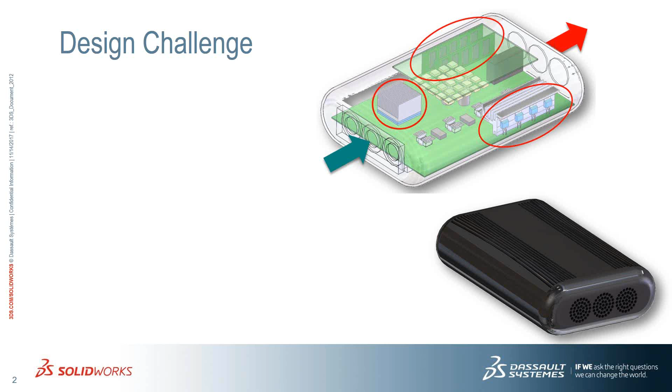At this point, I'm going to hand it off to Joe to talk about the design challenge and the initial simulation setup to investigate the airflow. Joe, go ahead. Thank you, Sasi. So today's design challenge, as you can see, representations of the geometry that we're going to be working with today. And I want you to think of the constraints that we want to model to.

Okay, so first in the top right, we have a CPU that we want to maintain at a max of 68 degrees Celsius. We have a package of integrated circuits that are connected to a customized heat sink, as well as some RAM chips along this board here, down to a maximum of 59 degrees Celsius for the chips, and the integrated circuit package is 95 degrees Celsius.

So if you focus on the bottom right image, you can see some features, slots on the top here, and some holes for perforated plates that you would find typically in an electronic enclosure such as this. So one design consideration is to change the packaging. So we're going to look at how we can change that, as well as the number and configuration or location of fans that we have on the outside here, around where the circular perforated holes are. So our overall objective is to keep everything cool and minimize the heat buildup within this compact CPU enclosure.

So first, let me step you through the software by pulling up my SolidWorks interface here. As you can see, I'm working in the SolidWorks interface, and I can go to my configurations; I'm working with the default configuration right now. And to do an analysis, I'm going to enable through this toolbar my Flow Simulation tab, which allows me to set up the study that I want to run.

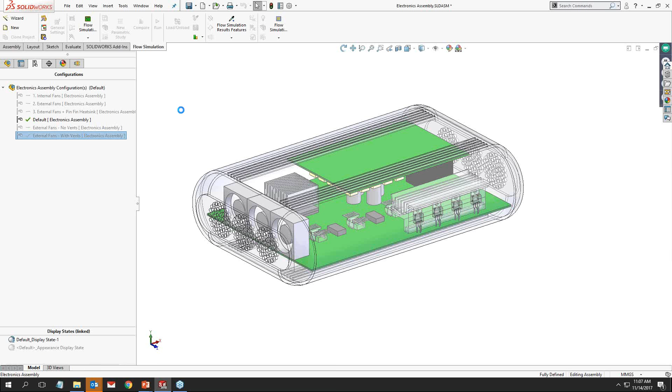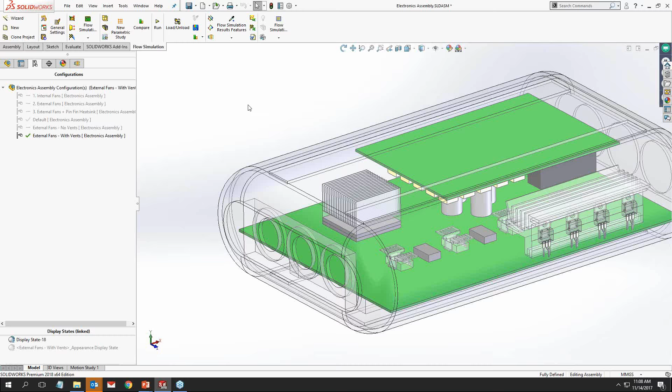Now, I'm going to run with a simplified geometry using a configuration, and that's to facilitate the analysis. A few things I will mention: we got rid of the holes and the slots, as you can see. We're going to be defining some modeling conventions that you would use in a thermal package like this to simplify it by using a pressure drop model, specifically called perforated plates.

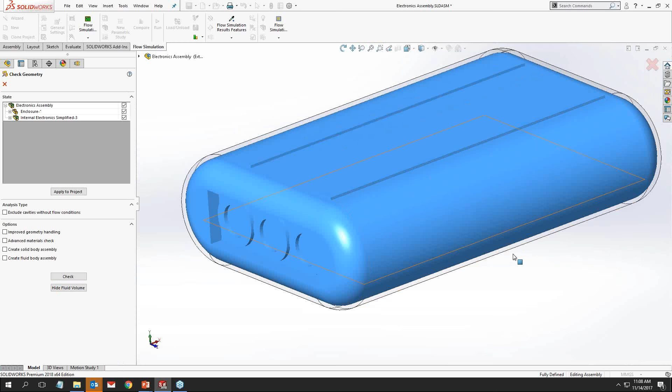So this creates a watertight solid. That watertight solid then lets the software know where the voided region is, where the fluid would be. So there's no need to create this fluid volume yourself. The software inherently knows it when you have a watertight volume for an internal flow calculation.

Now, for an external flow, if you wanted to also simulate the air around the outside, we would do that by an external flow calculation. And in that case, the enclosure does not need to be watertight, but you change the computational domain, the size of the box in which you want to simulate the calculation.

So we can set up a new calculation by working from a template, and if you're working on similar types of projects all the time, you can create a full template, which you can use as a starting point and then use different geometry for that template.

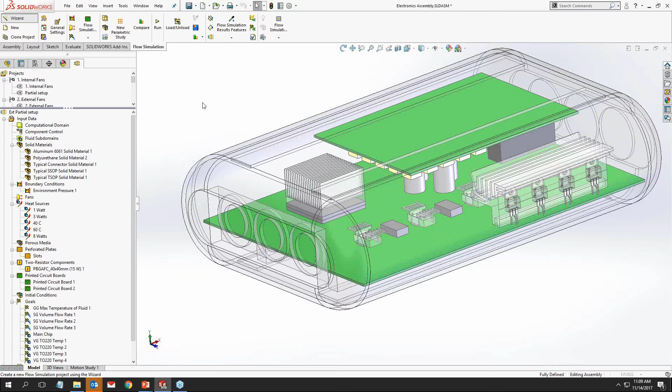But I'm going to step you along in a wizard-based interface, and I'll call this project name webinar 1. I'm going to step you along in this process of defining the initial settings for the calculation. We're going to quickly go through this, selecting first our units. There's your standard predefined like SI or Imperial or USA units that you can choose from.

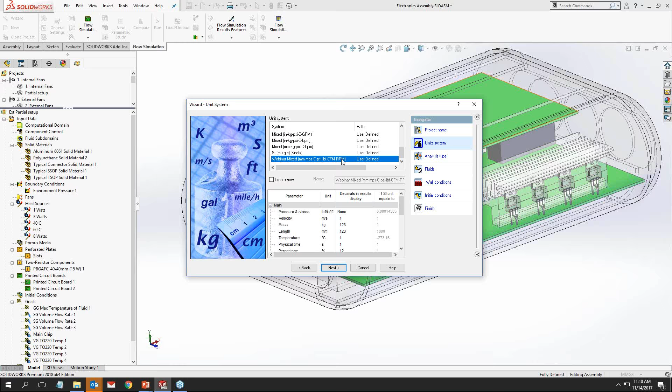But more often than not, we like to do something that's customized to what I like to use. So I have a mixed unit system that utilizes PSI, which I'm more familiar with, but we're also using degree C, as we saw in the definition of this problem. And there's a few other things that I've defined, and I name this to remind myself. So the fan flow rate is going to be in CFM, RPM instead of radians per second, and things like that. So you can customize the interface for your own usage.

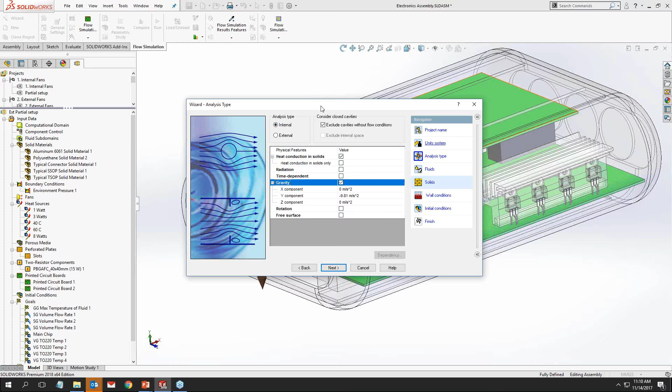Now we're going to look at the physics of the problem. So is this an internal or an external flow? As I mentioned, we're going to be simulating this as an internal flow. We're going to include heat transfer in the solid, and we want to turn on gravity. And so gravity is in this vertical direction in the Y as we would like that to be.

And we also mentioned that we have other thermal heat transfer methods such as radiation that you can include. So we're going to be doing both conduction and convection in this example, but if I wanted to, I could also include radiation. We do have local and global rotating bodies. We can do free surface flow, and we can do transient analyses as well.

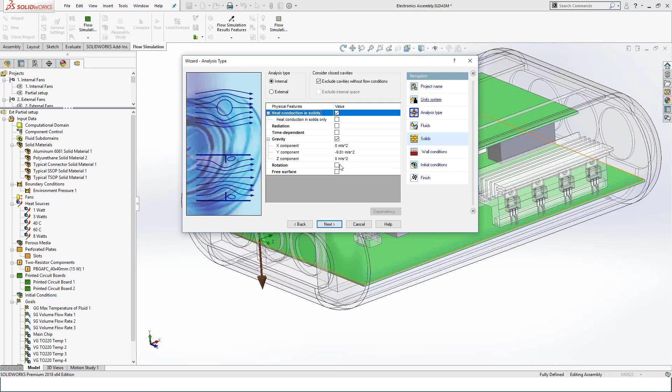If you just want to solve a problem over, say, 10 minutes and see what the results are after every 30 seconds, it would be as simple as defining these conditions as you're seeing on the screen right now. But this is going to be a steady state calculation for all the results that you see. So I'm going to disable that and move forward to my next case, where I'm going to define my fluids.

So we have a whole library of fluids, as you can see here, of different types of things: perforated plates, porous media, printed circuit boards, and other conditions that we can define. As you can see, air here has temperature-dependent properties for specific heat, thermal conductivity, and what have you. So I'm going to add this air, and I will mention real quickly that you can also define your own fluid properties through that library.

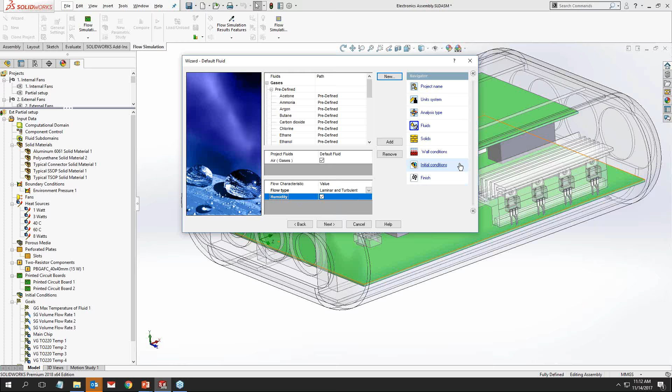I'm also going to enable humidity as part of this condition, and that will just change some of the conditions for that fluid, which I can set later in my initial conditions for the humidity of the environment.

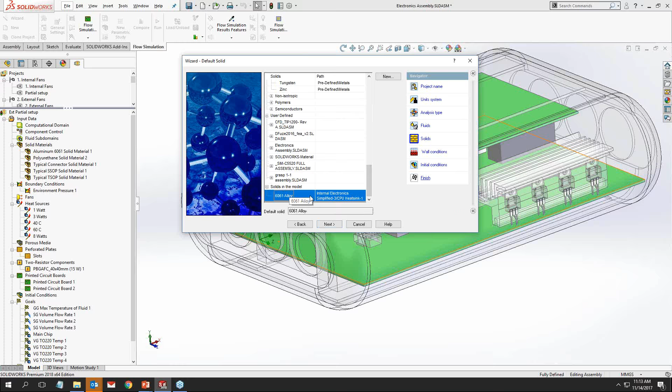Since we're going to include solids in the body, we just want to make sure that every part within the model has a material property defined for it. It may not be defined in the SOLIDWORKS model, but we need to have it as part of the thermal simulation. So we have your standard metal materials, also a lot of different alloys like aluminum 6061. So I'm going to set that as my predefined solid. But in fact, that 6061 alloy was defined in the SOLIDWORKS model, so I can reuse material properties that are defined in the model. So just making sure everything has a material property.

In my default outer wall condition, since this is an internal flow, how am I dealing with what's going on outside, whether it's fully insulated, or I can define a heat transfer coefficient, a wall temperature, heat generation rate would be another condition. So we're just going to say that this is at 15 degrees C, which is also 59 degrees Fahrenheit, and say 8 watts per meter squared Kelvin for a heat transfer coefficient as an average value over the entire outside.

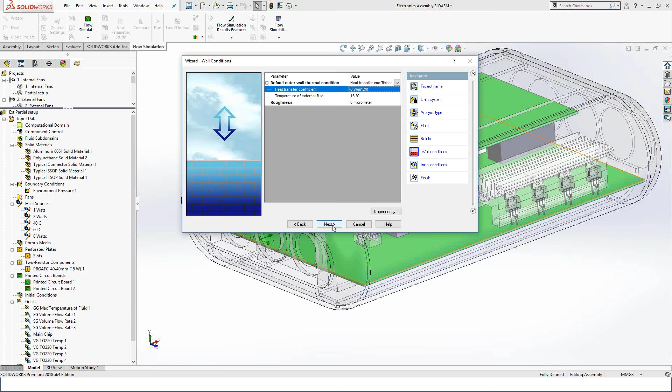Now, again, if you want to have more localized conditions, you could do that as an external calculation. So we're going to set here again our outside conditions. The humidity we'll just keep as 50%.

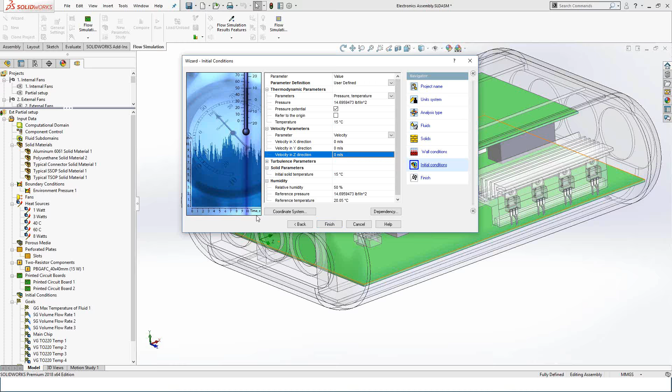Solid parameters, we can start that as an initial, same temperature as the other one. And this is just going to be sitting in stale, non-moving air. So those are my ambient conditions, or if you're running a transient, it would be your initial conditions.

All right, so you can see within the interface here, some of the first things you see is the computational domain, which can be modified. We can do 3D as well as 2D simulations. On a given body, you can utilize symmetry or periodicity.

So for example, since this is the same value, different sign, if I set the Z direction, if this were symmetric from left to right in the Z direction, I don't have to change the SOLIDWORKS geometry. I can just change the computational domain and then set this condition here as being symmetric like that. So it's a very nice interface for dealing with that.

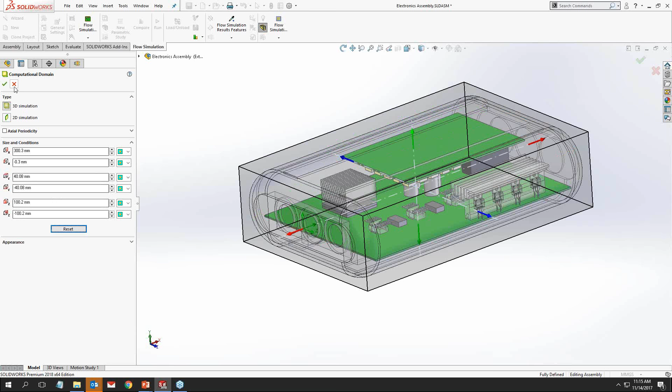And I just hit the reset button to bring me back to the normal because I'm happy with this, and I'm just going to hide that condition as such. Now, to facilitate this webinar, just real quickly, I already have some of this set up for me with some of the conditions, and I'm just going to walk it through with you, adding some additional conditions.

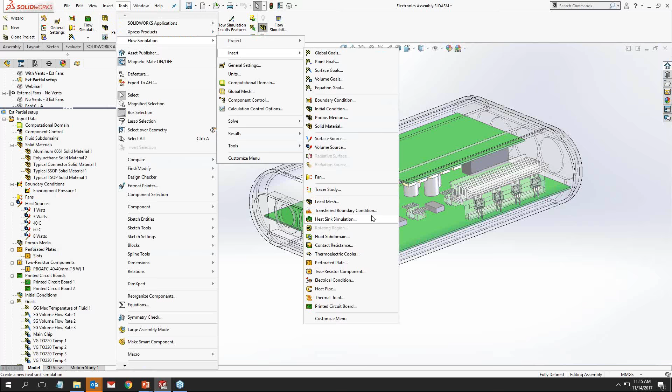Now, note that this tree is customizable for things that you're going to often be using, but you can always go to the toolbar and insert any condition that you want that is specific to a project. So these are default things that are always going to be in the tree, or things you can add to that as needed.

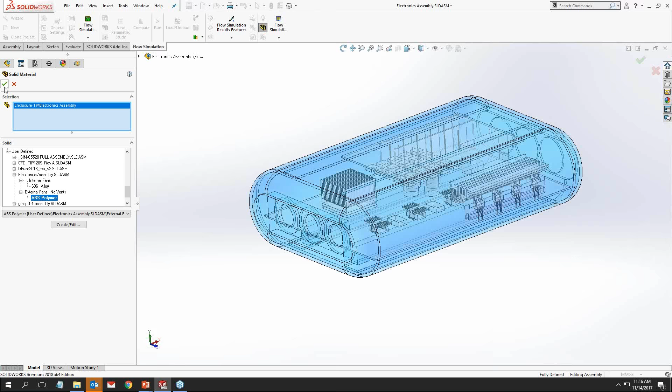In your solid materials, we can import data from the model, as you saw, for all the parts. Or here we also can utilize our library, and I'm just going to choose an ABS material. I believe this is an ABS material for this enclosure on the outside, and then that gets added here to that tree item.

Then we can define our boundary conditions. So we have inlet and outlet mass and volume flows, as well as Mach number. If, in this case, we want to do a compressible flow problem, we could do that. And then we have pressure conditions, which I'm going to be defining, so I'll come back to that,

as well as wall conditions. So, if there's some locally rough wall or temperature in the wall, or wall motion, if you want to define that, you can just set these as real walls, but we also have ideal walls and a different outer wall condition if you want to for this internal flow calculation.

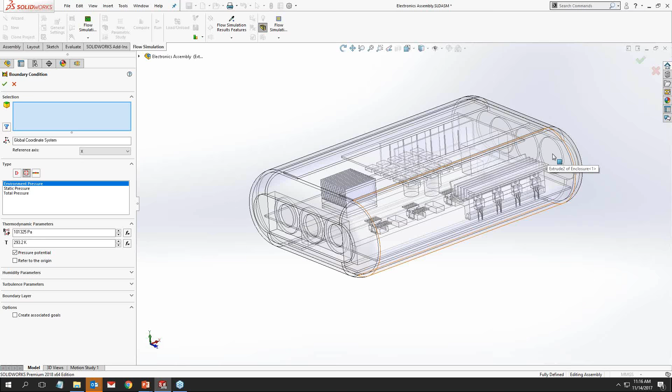But I'm going to be defining an environmental pressure and utilizing, if we zoom up here to see what I'm doing, right click and select other, just like you would in SOLIDWORKS, to select these faces which were closed off, and then I can define these environmental pressure for those at 1 atmosphere is what that value is.

So that was already defined. That's fine. I think I meant to define the slots, but you know what? This gives me the ability to show you a functionality real quickly here. So environmental pressure 2 is the ability to copy these slots to the project that I am working on here, which is the partial setup problem, right?

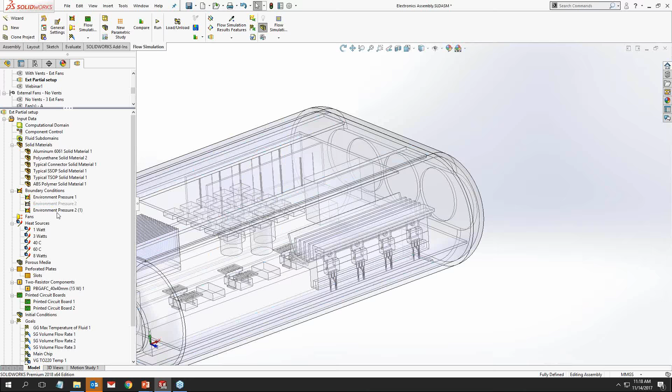So if I go back to this new project, you can see that that was defined and copied for me there. All right, and then we have our fans. So we can define these fans, which are set up here. They're on the outside, and they're only going to be blowing inside to the volume. We can have ones that are venting or fans that are set inside completely within the volume.

So this is the inlet fan, so I'm going to choose a face here, again using my selection tools to help me select the right face. And then I can choose from my library of fans my fan curve here.

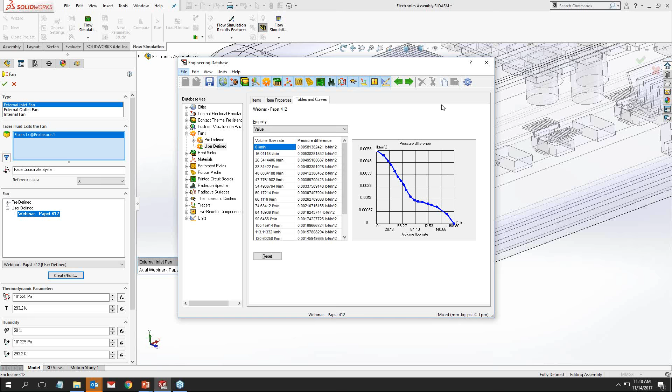And just to show you how this is defined, because this is going to be applicable later, is just the real way in a fan curve how it behaves with your pressure drop in PSI versus your flow rate that it can deliver at that pressure differential. So we'll set that here for us and hit OK.

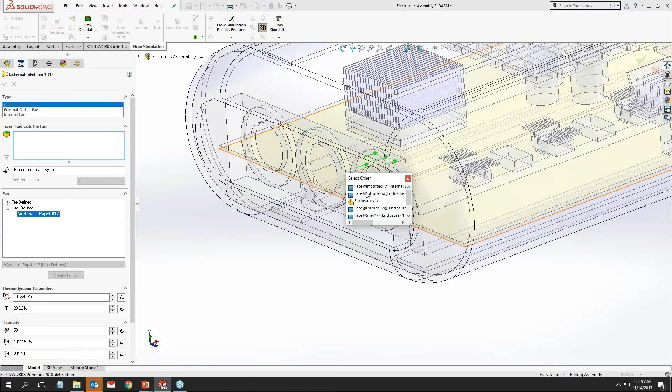All right. So we can do this for all the other ones. Again, just copying this to my existing study. And then just assigning a new face for this is one way that you can do that. So just choosing that new face there.

And then you can, using Windows functionality, copy that to there. And then we could define the other one in the same way very quickly. You can see that this interface allows you to do this quite easily.

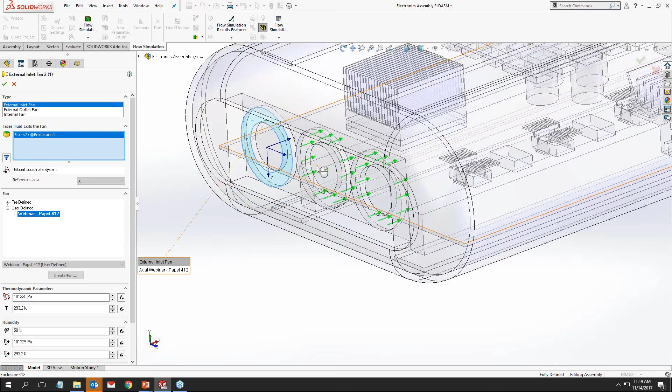Oops, 3. Wrong one, that's okay. And then we have heat sources. So let me run through with you the heat sources that we have here. We have these 4 components. Each of them, since there's 1, 2, 3, 4, are a ¼ watt each. So we define these as a total. And since they each have the same volume, they're the same component, we can define them like so.

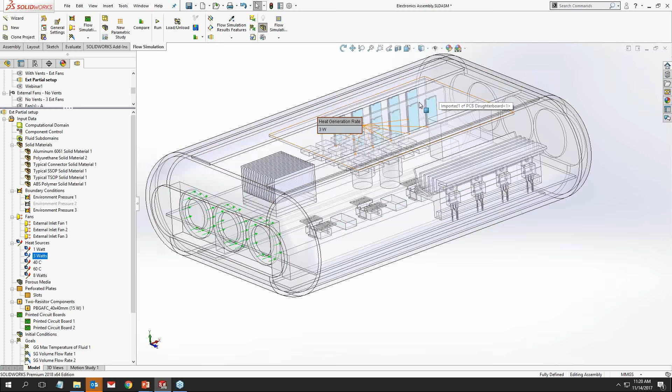We have 3 watts on all of 1, 2, 3, 4, 5, 6... 1, 2, 3, 4, 5. Sorry, 10 total. 3 watts. 40 degrees Celsius for these capacitors. These are 60 degrees C. And then 8 watts, or actually 2 watts total. This name is incorrect on there. But these each have a ½ watt defined for them.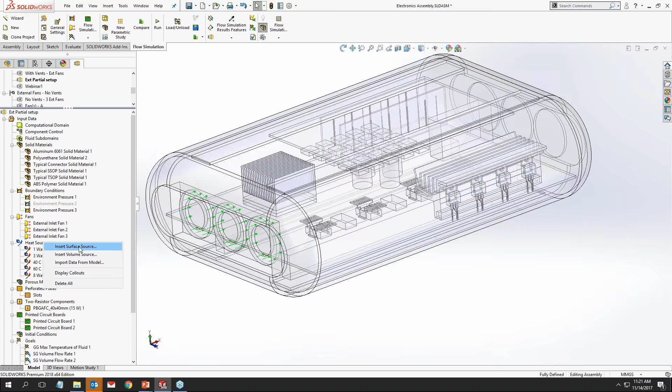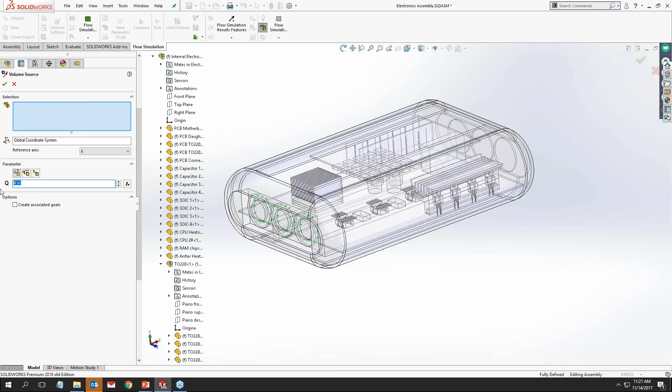So I'm going to show you, we can define a surface or a volume heat source, right? And the real difference there is just how you want to define those. So I'm going to use my tree and select these 4 components like so. So this would be one way in which you can do that, selecting them all and putting in 4 watts for the total. But let me clear this and make this only a single one, because there's another really nice functionality that I want to show you.

Let me see here. Okay, so let me just suppress this. I forgot which ones I was defining. So anyway, if I define this 1 watt for this, I can right click and again apply that to all the other conditions there. All right, let me just skip over that.

And how are we going to handle the perforated plates? So we have the slots that are on the top. Let me just describe what this is doing. So instead of having the slots modeled, what we can do instead is define the free area ratio, how much of that area allows flow to move through, and that sets up a normal pressure drop. So that's one way of doing it.

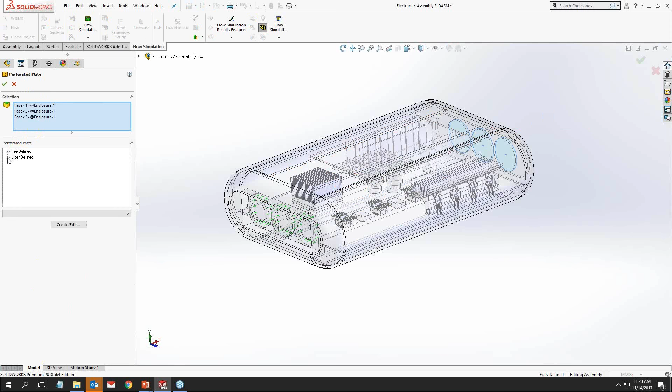Now, if we have something like small circular holes, which we're going to do on the back of this here, I'm going to pre-select this pressure 1, so those 3 faces, utilizing information that I've already used, and then I'm going to choose this one with the circular holes, because there's also an additional way that you can define these. Whoops.

Instead of a free area ratio, you can also define a pitch. So these are round holes with a given diameter, and you can then define the distance between them, say in the X and Y, and that gives you a free area ratio. That should be like so. All right.

Just coming down here to our other conditions that we're defining, we have an integrated circuit, a plastic ball grid array, 40 by 40, and we're defining this as a 2-resistor component, just to show you some of the details. So these are the components we're defining it to, as you can see selected here. The face that is connected, the hot side, is connected to the heat sink, and this is generating 15 watts of heat.

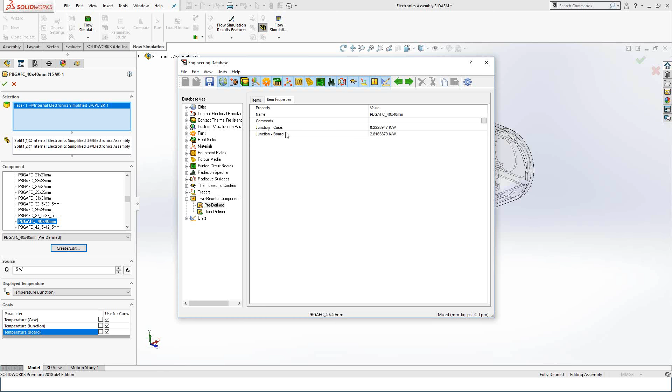And just a little bit of information about this specific plastic ball grid array. You can see that we're defining the 2 resistances, junction to case, and then junction to board, in that vertical definition.

And we have printed circuit boards, where in this definition we are defining the dielectric or FR4 materials and the conductor or copper materials, and then we can set up in a table how many layers, the thickness of the layers, and how much copper is on each conducting layer. And then it'll calculate the orthotropic material in plane and through the thickness, and also the effective density and specific heat for this 4-layer board.

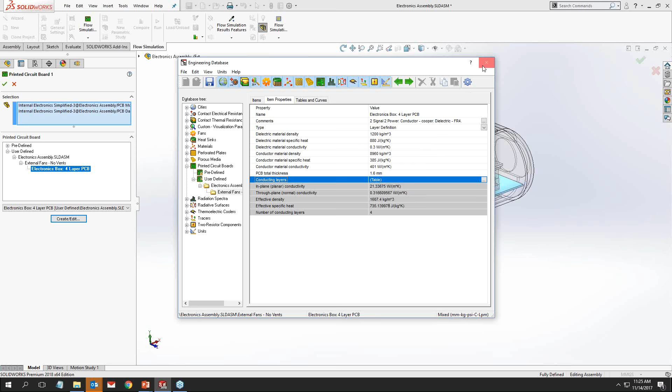So we have those printed circuit boards defined, and then the RAM boards defined in a different way. And then to set up what is important, the information that we want to get out directly from the calculation, as well as using these as convergence criteria, we can set goals either globally, at a point, on a surface, a volume or component goal, or defining an equation, say if we want to find pressure drop or other things. So defining a volume goal real quickly here.

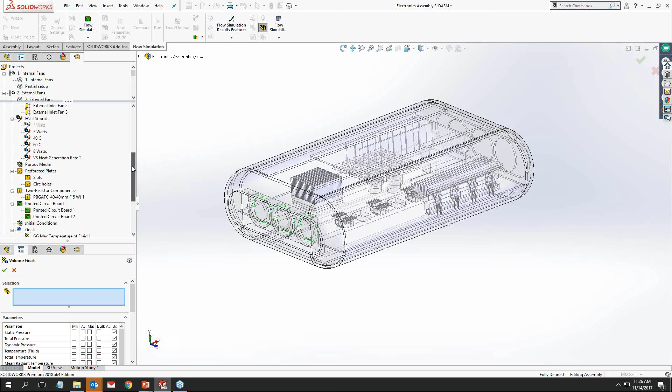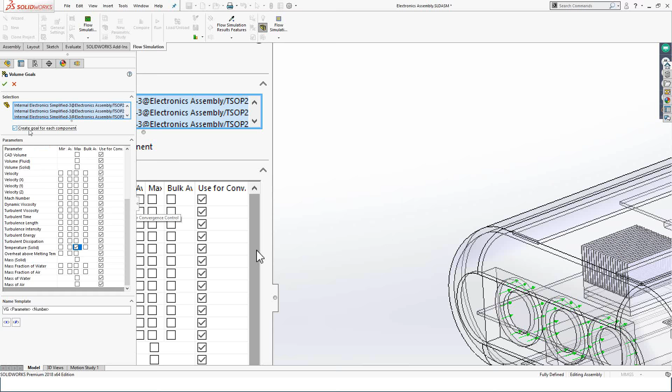I can reutilize information, just choosing this and then selecting the RAM chips from that. All of those are populated here within my selection, and then I can choose my temperature of solid from this list down here and choosing the maximum value from this column right there. And then define a goal for each component. And that defines all of these, and I can rename those to be more descriptive.

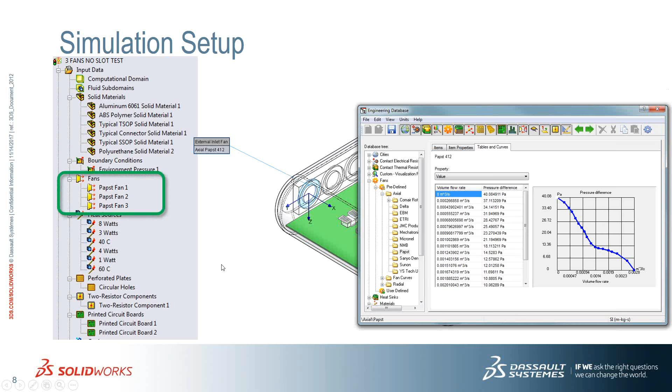All right. So let's go back to the PowerPoint real quick, just to review this setup. So we set this up as an internal calculation with heat conduction in the solids, as well as gravity, setting up the air condition as our fluid, defining our environmental pressure condition, in addition the circular perforated plates, defining that pressure drop, as well as the fan condition, those 3 fans, setting up our heat generation rates as well as our printed circuit boards, and then we can run the simulation.

All right, so Sashi will run through and show you a little bit more about how you can do multiple simulations, but if you're running just a single setup like this, you can run it on as many CPUs as your machine has. In this case, a quad core virtualized to 8. And you can see that it's utilizing all of those cores very effectively. We can run the simulation, and you can plot out and view the progress of these values as they're calculating and iterating along.

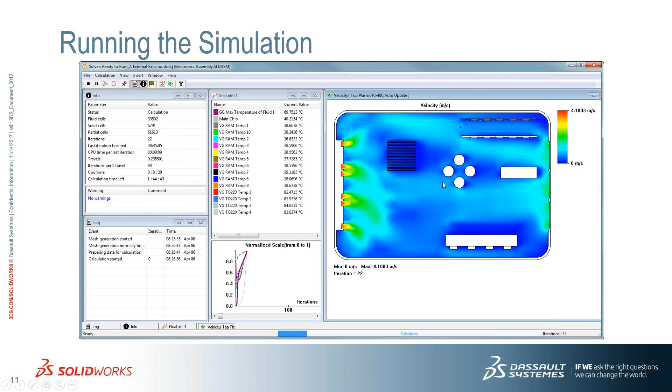Similarly, for a transient calculation, you can have the X being the physical time, and you can also visualize the results as they're calculating, either as contour plots or vectors. All right, so it gives you progress on the simulation. So really quickly, the setup is easy to use, it's embedded within SOLIDWORKS, and it does a very good job to allow you to set up your thermal problem. So let's take a look at what types of results that we can look at.

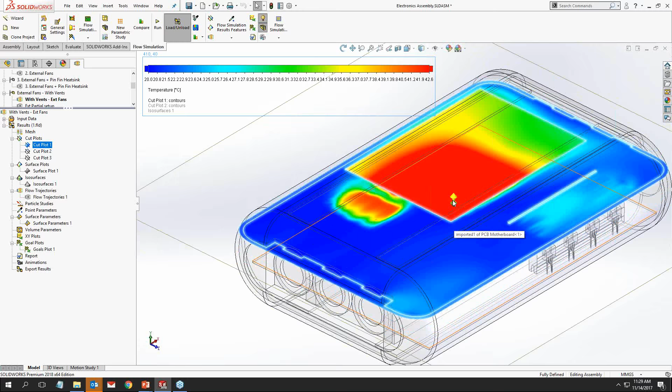Going back to our interface, let me go to this problem that is already solved and go to my results, and I'll just load those in. So we can show our cut plots. As you can see here, we have our temperature. Let me make this horizontal here and expand this a little bit so you can see this. And we have the results everywhere in 3D. So you would only be able to see this type of information from a virtual simulation like this. Okay, so you can drag and drop that anywhere.

You can also probe the results, right? So if we're interested in the temperature as well as maybe velocity in different locations, you can choose which parameters you want to show. So I'm going to show the location of those points as well as the velocity at all of these, if that is applicable. Here you can see on my solid it's 0.

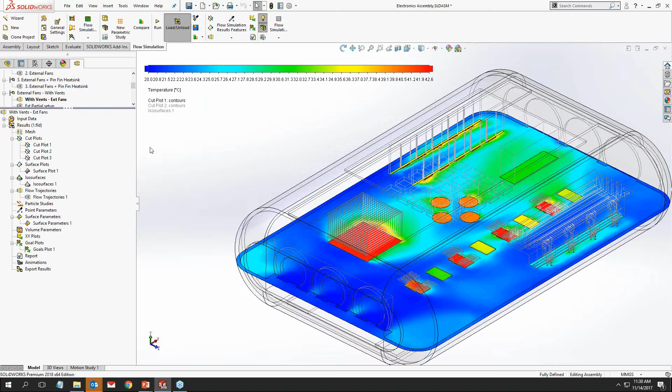We also have surface plots to show, say, the heat transfer coefficient on this heat sink, as well as combining this with our flow trajectories colored in a different color scheme from 0 to the maximum velocity. And I can play these flow trajectories to show how that is acting to cool down that heat sink. And you can see that only on the front face of that do you have the maximum cooling efficiency.

All right, so you get a lot of different visualization capabilities, but we're not limited to just that. You can also take a look at those goal plots in greater detail, right? So insert a new goal plot, choosing all of those, and we can show those on the screen at the bottom here like this, either a summary of all of those values or a history of how they iterated and converged on those results.

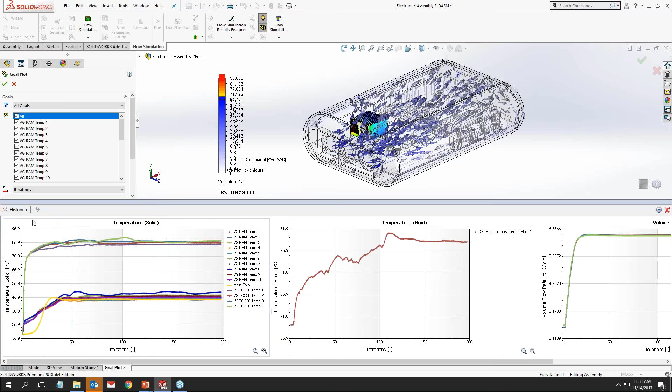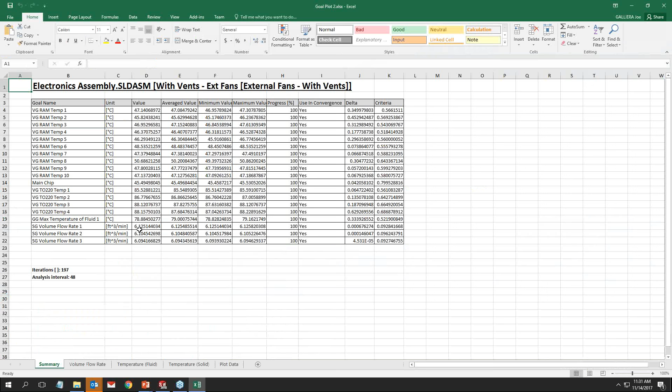And we also utilize Word, Office, Excel, and you can export that directly to here and set this up for the ways that you want to present the data to your clients and colleagues maybe within the department, okay? So there's a lot of great information that you can gather both visually and in the data to understand the performance vividly. Now, in this situation, we noticed that there's a lot of room to improve the design. So I'm going to hand this back over to Sashi, and he's going to lead you.

Let's hand this ball over to Sashi, and he's going to lead you on these design alternatives that we can evaluate. All right. Thank you, Joe.

Okay. So now that Joe has gone over the initial setup, this is very typical in a design environment where you have your initial design and you set up your analysis with all the given components that you have within your enclosure, and then you proceed to run the first iteration just to see what's going on internally. And flow simulation gives you that idea, right? So now we have a better understanding of how the airflow is flowing through the perforated areas, how the air is flowing out of the vent, how we are cooling a lot of the components in the system.

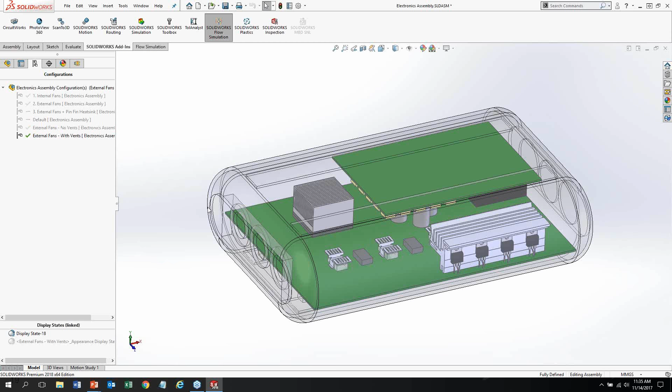So using SolidWorks, and this is really what's nice about flow simulation being fully integrated with SolidWorks, at any time we can go back and forth between the analysis environment and the design environment, right? So now we are taking a step back from the analysis environment and saying, okay, we're going to make a change to the actual design itself. So if we look at our configurations, we have several different designs. Our previous design had external fans with vents, and if I just do a quick section view, we can see how that vent was created here.

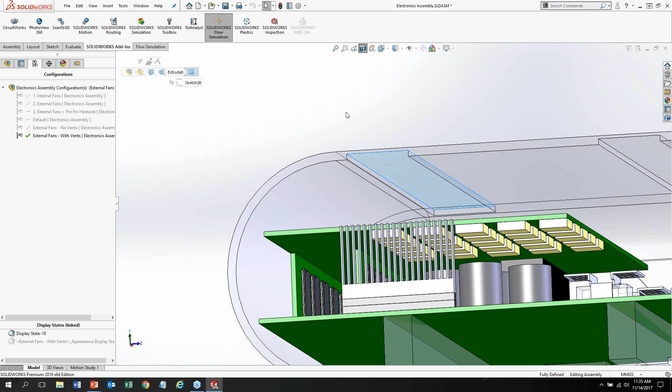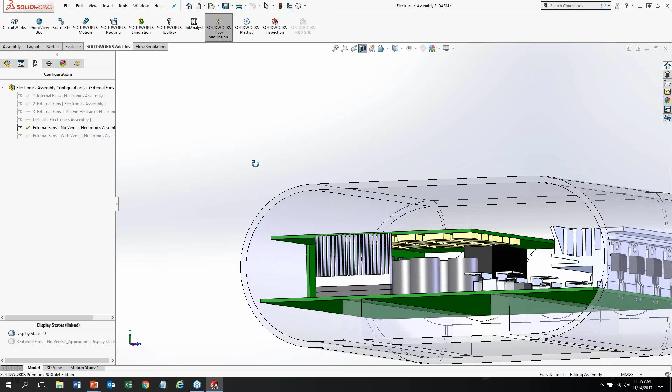And as Joe had mentioned before, this is a simplified model, so we don't actually have to model the actual vents itself. By setting up the surface area as a perforated plate in the analysis environment, we're able to solve this much quicker. So here is the vent in question, and all we needed to do in SolidWorks was to suppress this feature right here of this voided area. So I'm just going to switch over my configuration to no vent, and you can see now those vents have been removed. Okay, so I'll just click that to turn off the section view.

And we'll go back into our flow simulation projects. In terms of running the analysis, we don't have to recreate the entire analysis, right? Because all we did here is change the design, but 99% of the design still remains the same. So all we needed to do was clone the original study that Joe had created, and that can be done very easily. It's very similar to what Joe showed earlier in terms of copying to project. So for example, we have several different projects here. This is the project with vent. All you need to do is just right click the project and say clone.

And we'll say select configuration, and you just select one. We can say external fans with no vent, and you can hit the green check mark, and it will create the project that looks just like this. And automatically the perforated plates for the vents would be suppressed, or you can just right click and delete it all together.

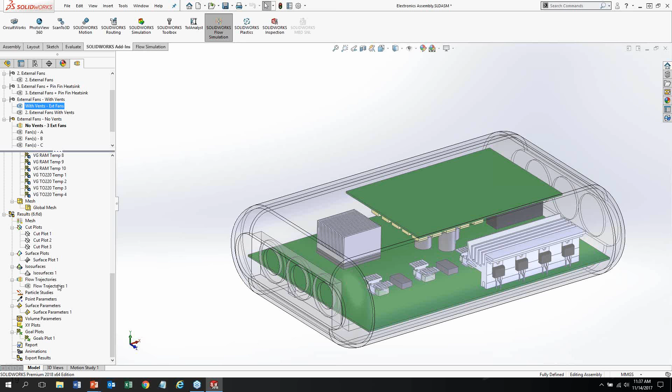Okay, so the analysis itself, we didn't have to make any changes, very quick and easy. All we needed to do at this point was right click the study and hit run, let the analysis run, and we can view the results. So we'll go ahead and jump right into the results. As Joe had showed earlier, the best way to see the changes or any type of airflow is to start with the flow trajectory.

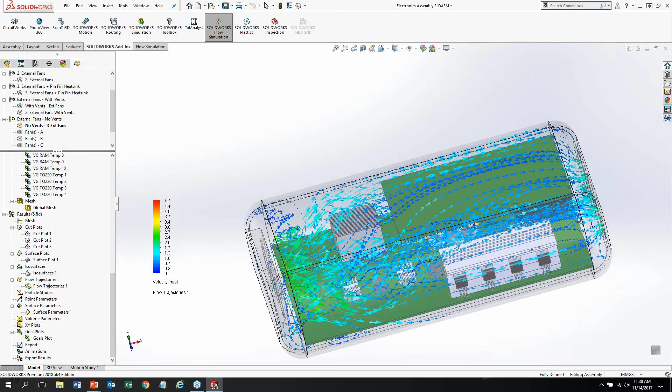So I'm going to say show, and we can just play this just to get an idea of how the flow is moving now. So you can see right off the bat, the change is that the flow is no longer moving upwards in the vented area. It's moving right through the system, from the fans to the holes at the end here, the perforated holes.

But the question is, are we still removing the heat, or the dissipated heat in the system as well as we did before? And the best way to do that is to really dive into the model. And there's several ways we can do that. We can either use a point parameter, maybe surface parameters. We can probe the model, and we can extract the information that we need.

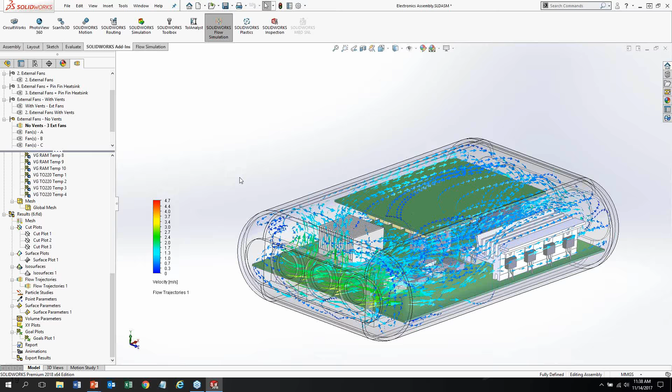Now, we are mostly concerned about three main components, and I'm going to show you in a second. We have a graph showing exactly what the temperature difference is with the vent versus no vent. But before we jump into that, I'll just show you the cut plots, so you'll be able to see it.

And I'm just going to make this a transparency. And that's another nice additional feature of the integration, is that at any time I can select any of the components and make it transparent to really dive in and see what's going on in the analysis. So we can see here, we might have taken a screenshot of the previous analysis with the vents versus without the vents. And we can see how the air is distributing now in this system.

So we'll switch back to my PowerPoint, and we can see the analysis with no vent versus with vent. So you can see how the air is flowing upwards versus the air moving directly through the system. So at this point, we might say, well, it seems like we are pushing hot air onto other components versus having released hot air.

But based on this view as well, we can see that there is some cold air being removed from the system through the vents. And this is due to the differential in pressure in the system, because when we have the vents, we are reducing the amount of air pressure within the system. With no vents now, there's only really one airflow in this axis, from the inlet to the outlet.

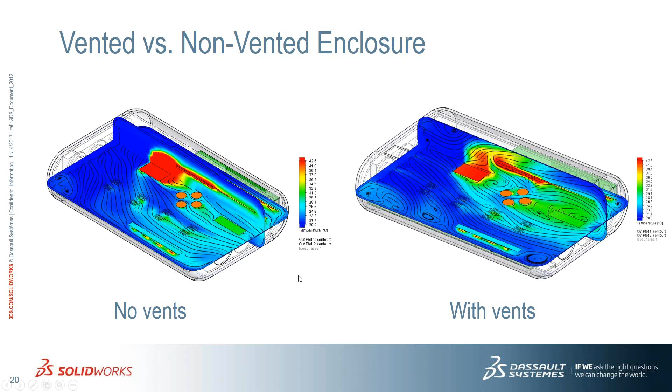However, for the RAM chips that we have within the system, we actually saw a decrease in temperature with no vent. And the main reason for this would be that we are restricting cold air from being released out of the system. And now we're actually having a more consistent airflow throughout the system with no vents, and those RAM chips are now getting a good distribution of cold air as well.

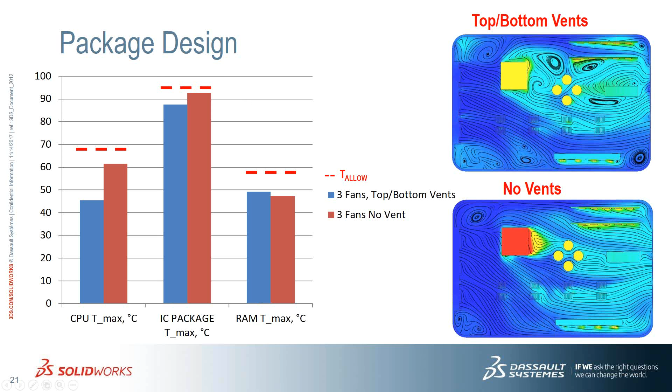So at this point, we might still be considering, well, is no vent worth it, right? Worth the extra added manufacturing cost. So not only with the vents, there's a few other things that we can consider here as well, right? So we say, okay, maybe we can go with no vent. However, can we still optimize perhaps the fan configuration to get the airflow as good as we did with the vents and all three fans blowing through the system?

So Joe had showed earlier setting up 3 different fans, and there is a question of whether all 3 fans are required in the system. So there could be different requirements in your design environment. There could be a noise requirement, right? 3 fans might be very loud. We might need to reduce the number of fans.

The position of the fans could be a requirement. And also 3 fans could potentially affect the airflow of the system, because now we have air intersecting each other. The differential in pressure within the system has changed. And again, going back to SolidWorks, we can easily test all these different configurations quickly.

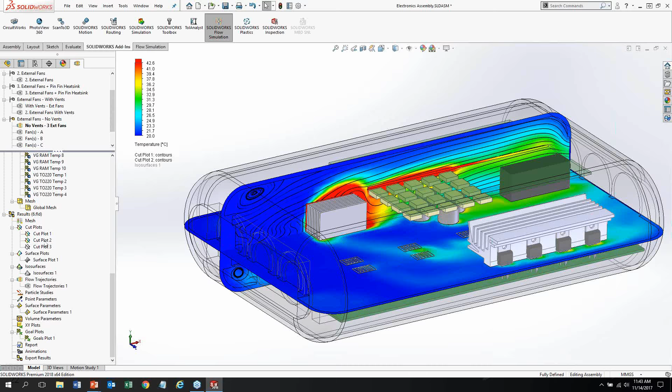So what we have here is we have 3 fans, which we have labeled A, B, and C. So I'm going to quickly just go over the airflow or the flow trajectory, so you can just see how the air is flowing through the system for A, B, and C. And then we're going to go back to the PowerPoint and see the difference in results.

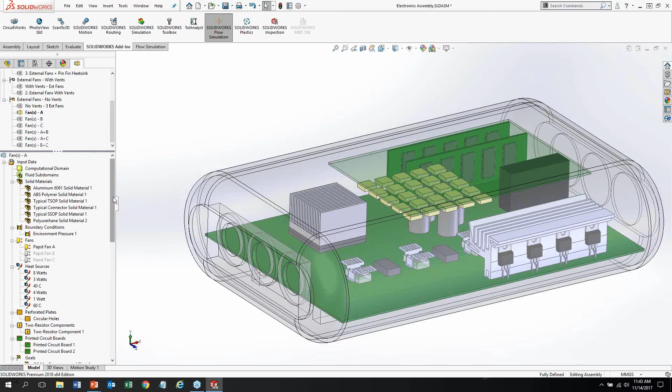So we will just activate this configuration, fan A. And I will say play. And here you can see that all we needed to do to specify that this configuration is only blowing air through fan A, and fan B and C are turned off, is just coming into the analysis and suppressing those 2 other fans. So you can see how easy it is to toggle between your different designs, right?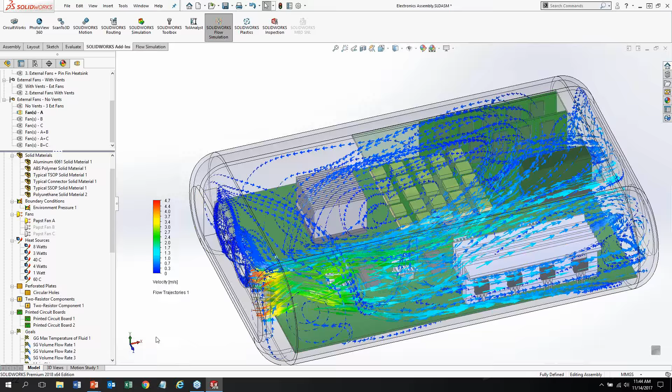So we have 3 fans. Now we're going to say, okay, we're going to just test for fan A and see how the air flows. And now we can see that there's a high airflow through this heatsink area right here. And I'm going to stop this. We'll look at fan B. And I'll just load the results here.

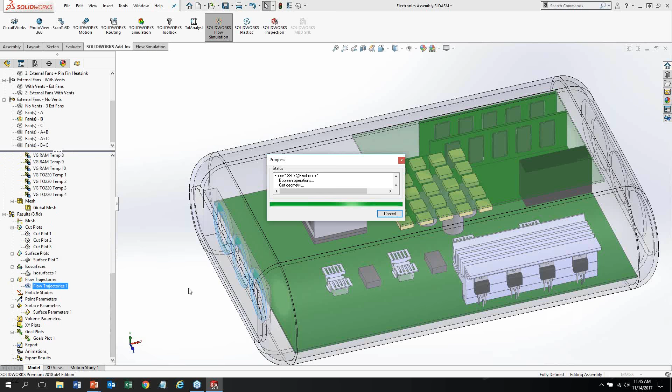Give me a second. And let's see the flow trajectory. And here is the flow trajectory for fan B. So you can see that we are creating somewhat of a whirlpool effect here. So a lot of cold air in this area. Not sure whether it's required in this sense. However, just to give you an idea of how we can quickly change the configurations to view the different airflows within the system, right?

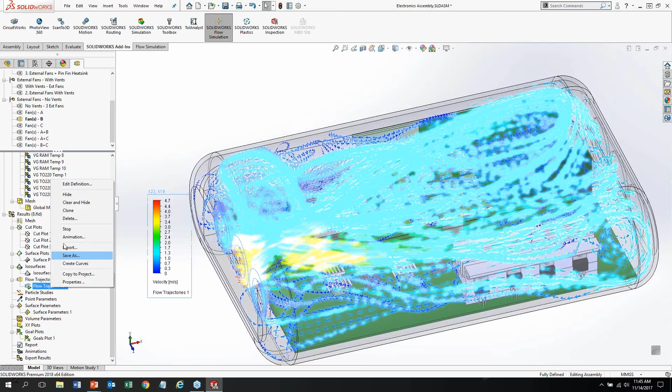So all this is still being done in a virtual environment. There are no prototypes being built yet, and we can use this different information to make the best design at the end of this process. So I'm going to stop this, and we will go back into the PowerPoint to see all the different configurations we have.

So just to give you a reminder again, this was A, the first fan here, B was this middle fan, and C is this third fan. So A, B, and C is only fan A or fan B or fan C being turned on. Then we have another configuration with fan A and B turned on, fan A and C turned on, and fan B and C turned on.

Now at this point you might be saying, well, there's quite a few analyses. It might take time to set up the analysis. Well, we already saw that cloning the analysis will help with that. We can very quickly just clone the analysis, suppress the fans, and run the analysis. But you might say, well, running 6 different analyses back to back might be time consuming. Well, in SolidWorks, we do have the ability to batch run our analysis.

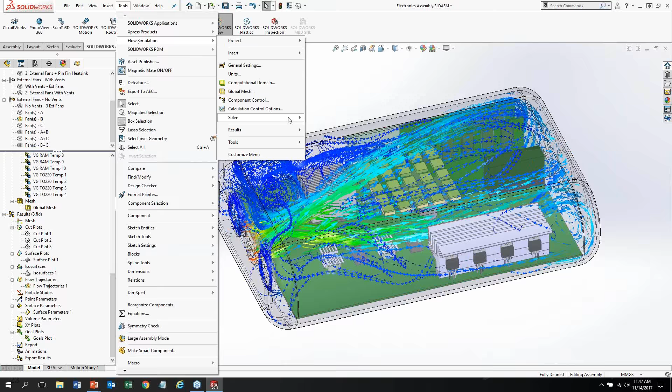So if you go into our tools here, Flow Simulation, and look at Solve, we have this option here called batch run. Basically what batch run does is it will take all the analyses that you have pre-set up. So in this case, I can set up all the different fan configurations. And at the end of the workday, when you leave to go home, you can actually just batch run your analysis and say, run all these analyses back to back.

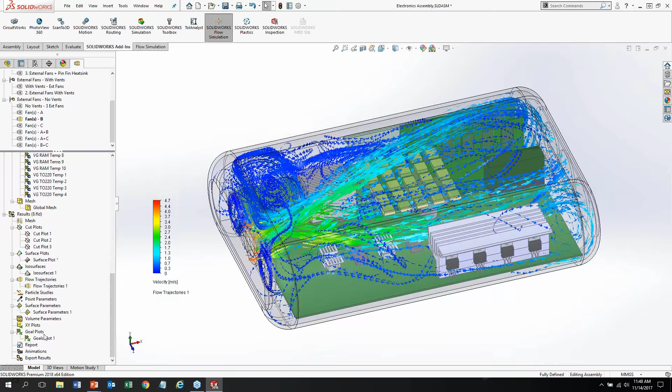And when you come back in the morning, you're going to have all these results ready to go for you to view the difference and compare the different configurations that you have to decide the best assembly. So in addition to flow trajectory, because of the way we had set up our goals, there are many other results that we can also view in this analysis, such as your goal plots.

So I'm just going to go back into this analysis right here, and you can say show. So here's a goal plot of this analysis, and we can extract information, for example, the heat sink for all three different configurations, whether it's A, B, and C, using this graph.

And all this information can be transferred to Excel format, so you can extract the max temperature, the minimum temperature for the analysis as well. And by compiling all this information, we can come back in here and we can graph something like this. So here again, the three main components that we're concerned about are the CPU, the IC package, and the RAM chips. And we can see the different configurations that we have, where this is all three fans turned on. This is only fan A turned on, only fan B turned on, and so on.

Now, clearly, when we have the air blowing from just the first fan A here, this entire area where the CPU is located is being missed, right? So there's no direct airflow on that area, which is why we can see there's a spike in temperature. So this first configuration, A configuration, is probably not going to work, and we just take this out of the equation.

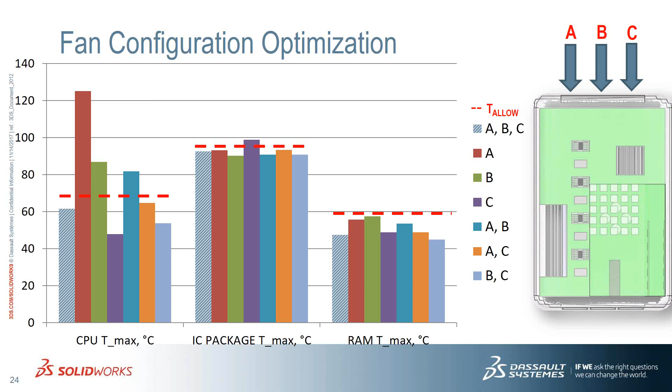However, if we look at some of the other configurations that we have here, such as perhaps B or C, we can see that for the IC package there's not much change in temperature. And also for the RAM chip, there's not a big change in temperature. However, there is a significant change of temperature for the CPU when the air is blowing directly on C. So here, what we've uncovered is that just C alone, one fan, could work for this analysis with no vent included. So let's go ahead and take a look at actual numbers.

So we'll see here that for the IC package, our T max is all within the 90 range, so plus or minus 2 or 3 Celsius. And again, as I said before, that A fan is just out of the question here, so we won't even consider that. However, with the C fan, we are getting a temperature of 93 degrees, so it's probably about 3 degrees higher than the minimum temperature, where we have A and B or B and C fans.

But another thing that we have discovered here is that 2 fans is giving us better temperature than 3 fans. And Joe will talk a little bit more about why that's the case, right? Because with 3 fans, maybe there's more airflow flowing to the system, so there should be more cool air, so why is the temperature going up? So these are the type of questions that might come up as you're designing this, and we're going to address that towards the end of this presentation.

So just to summarize again, just fan C alone might be a good option, or fan B and C might be a good option. So it looks like fan B and C might be the best option here to go with. But again, considering noise, we might say, well, to meet the noise requirement, maybe we have to go down to 1 fan. And now we know that C would be the best option for that. Again, it all depends on your requirement.

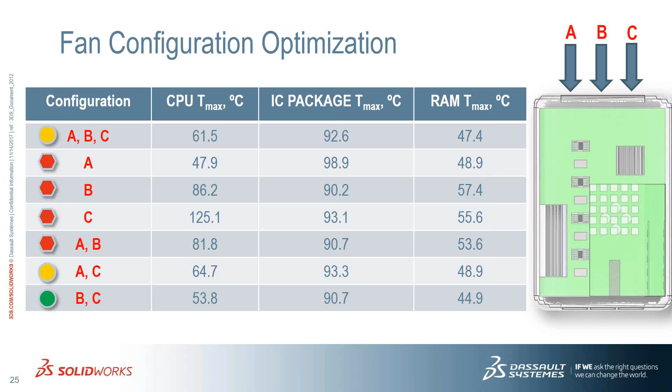Now, somebody might think that having all 3 fans would be the best approach. Add more fans, you're going to get more cooling, and that's not necessarily the case here. That's a real effect of how these fans really operate. Having additional fans, while being noisier, also creates a higher pressure differential, and the fans actually don't deliver as much flow rate as they really could. So having fewer fans in ideal locations gives you the best mix and optimal design. And this was all done in a virtual environment.

So if we take a look at a summary of the benefits that we tried to share with you today, one is that having this flow simulation software embedded within your SOLIDWORKS design package allows you to do things that are already familiar to you, such as using configurations. So it's a really easy to use setup, and it's defined using terms that are familiar to design engineers.

We can efficiently set up multiple design considerations for a thermal analysis problem, showing you many of the different ways we can do that with perforated plates, integrated circuits, PCB definitions, cloning, copying, and we didn't have a chance to show you our parametric study tool, as well as the optimization tool that we also offer. So those are all different design variations that you can do very easily.

And then Sashi did a great job in showing you how you can use our tools to compare the designs graphically, as well as with actual physical numbers. So all of this was done in a virtual design environment without having to create any components, and I think that is the best way of attacking a problem when you can easily make changes within your SOLIDWORKS design environment.

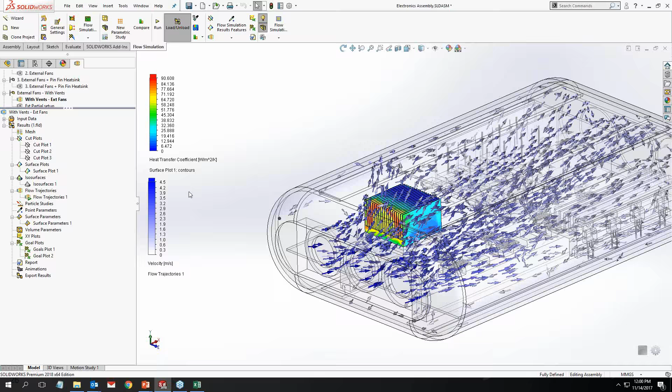Amit is asking the question, how do you get an average value of any surface parameter at any surface? Well, this is why I transferred over to my screen here. Let me dock this and stop this animation here. And I can show you that if there was something that you didn't already define as a goal, you can define a surface goal, right? And you're asking about the average value.

There's also in the results surface parameters as well as volume parameters, so you can insert those after the fact and get an average temperature on a component. You can just choose this face, for example, and if I choose even all here, it's calculating it now, it'll give you all the pertinent values for this. And these are, in terms of the fluid area, integral parameters.

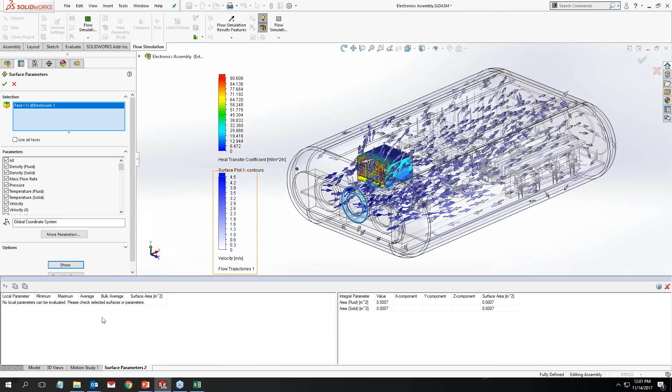I guess I could add a parameter here. I was going to show you how you can add other parameters in addition to that if you wanted to get the volume flow rate and things like that, mass flow rate, if that wasn't in this list as shown here.

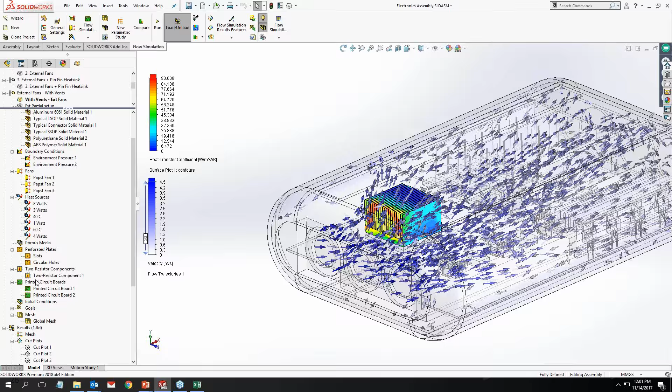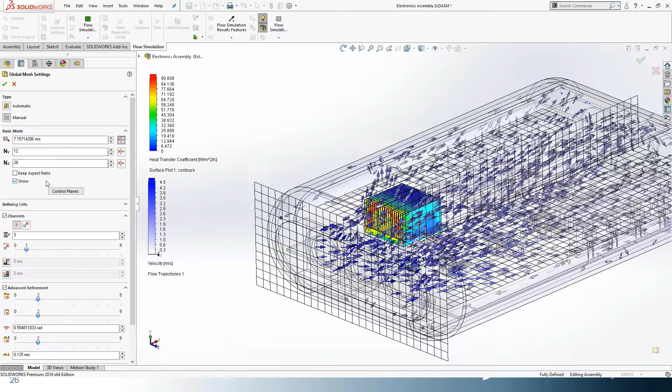Oh, and then also in the mesher, just to show you, the global mesh setting here was defined with a manual setting of defining the number of cells in a given direction. So you can do that, or set the size of the cell in the X direction. Also, there's a way of controlling through different planes, breaking that up into several volumes in an X direction or any one of the directions. You can do that. And then, refinements within there.

This is the automated mesher, choosing different levels, which does basically some of the same things. Small gap sizes, you want to capture those. So if the size between the fins was, say, 1 millimeter, it'll make sure it refines it within that region.

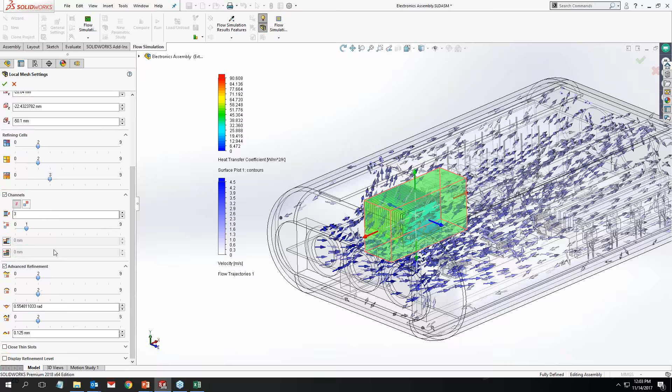And then also, just to show you a local mesh setting, this can be done through any geometry that you can create that will be disabled, or you can create primitive geometry just using, say, this box. If I were to capture this box around the heat sink, I'm just doing it very quickly, then we can define how many cells to cut that initial basic mesh down, and other channels and refinement techniques like that in a local mesh setting.

Okay. So the next question here is why not simulate an exhaust fan? Alex is asking that question, and you absolutely can. There can be instances where you model an external fan on the outlet, perhaps a centrifugal fan that basically pulls the air in the intended direction from the inlet fans. It's just the way we have set up this analysis. We don't have an exhaust fan, but that is something that you can set up in your analysis.

I'll take the next question here, which is how can we determine where the fan is on the fan curve with the system resistance? You can do it one of two ways. From the system resistance using an equation goal, you can find out what the pressure drop is from the inlet to the outlet to determine it like that, or you can actually just get the volume flow rate from that fan surface, and that is another way to determine where that is on the fan curve. So good question, Rusty. Thank you.